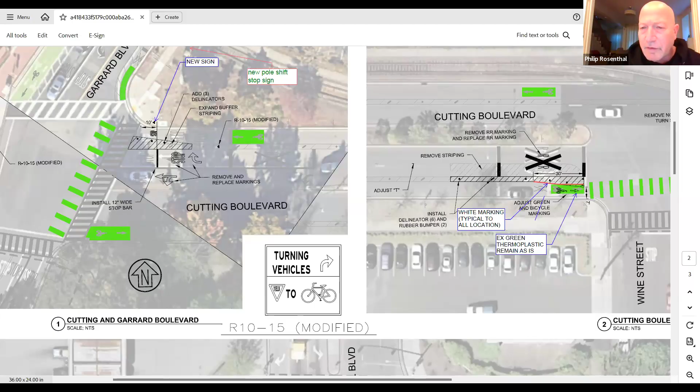Just to clarify, this is Scenic Avenue, pretty much where it meets the top of Tunnel and joins East Scenic. So are you going to stripe Tunnel, to help the cars understand how to go? Yes. Absolutely, and it all came with the request. Philip is the lead, and we listen to the community, and we're invested, so we heard you and we're taking action right now.

Second project, I don't know how much you guys are aware of, Caltrans is going to shut down the on-ramp and off-ramp at Stenmark starting June 1st. We usually get notification from Caltrans, and like I said, the Stenmark Drive on-ramp will be closed sometime around June 1st or 2nd. So stay alert, don't take that ramp to the 580.

As Philip mentioned, let me bring it back. As Philip mentioned, we've got three projects ongoing. The first one is the cut through, which is sponsored by BATA. Basically, the scope is to deter motorists from driving through the local streets of Point Richmond, and we're going to study and enhance it, maybe increase additional crosswalks and additional humps. We're still gathering information, and we need your input, it's very crucial.

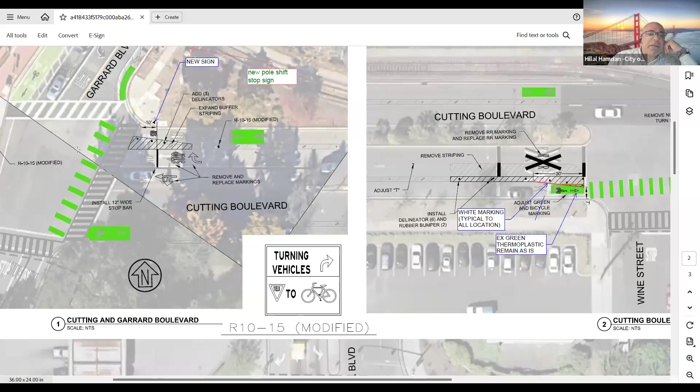On Cutting Boulevard, we're going to stripe it differently. Instead of going straight through like right now, we're going to make it, as you can see, a right turn lane, with lanes for right, straight, and left turn. So that's part of the enhancement that's coming. Hopefully in the coming weeks we'll have a contractor who's going to start working.

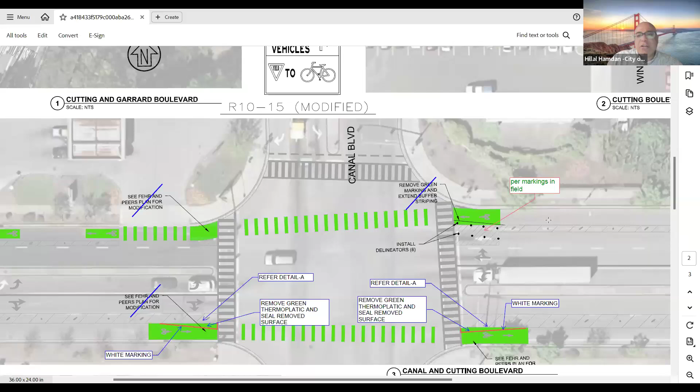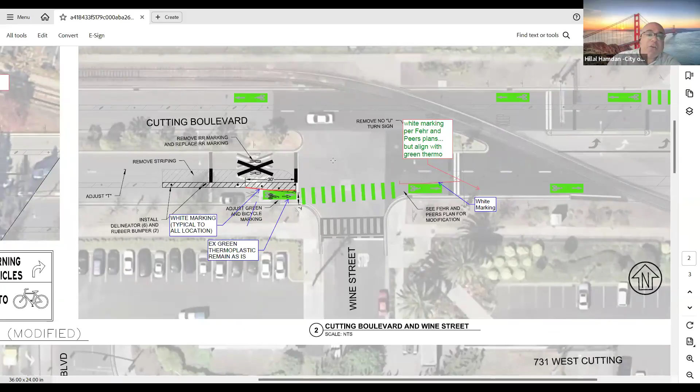Again, additional signage we're gonna be also removing. There's a U-turn here that says no U-turn. We're gonna remove it and let it through for people. For example, if we have a train stuck on the track and people still want to go through or make a U-turn, we'll have the possibility to do it at this time.

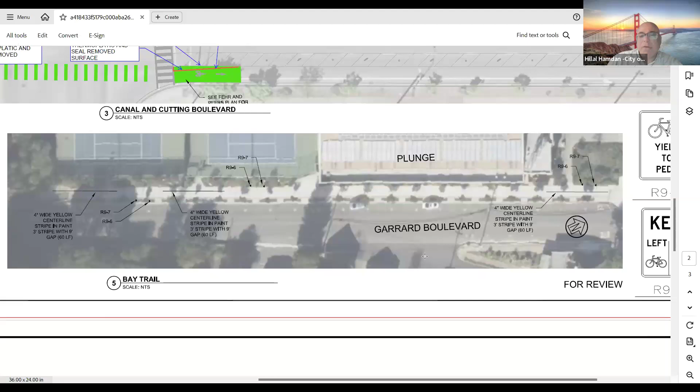This is part of the previous project, but again, comments and feedback from the community. So we're addressing it, we're gonna enhance it, and make it easier, facilitating the operation of the bike lane as well.

Before we move on to the next project, it looks like Peter has a question about the previous statement. Peter? You're muted, Peter. You are on mute, Peter. Unmute on your end, please.

And Kate, do you have a question also? We'll get you next. Can we jump to Kate Spalding and back to Peter when he unmutes? Edie, can you hear me now? Okay, now we have Peter, and then we'll go to Kate. Yeah, my computer died, so I'm on my phone for this meeting, and it took me a minute to figure out how to unmute.

Anyway, you had mentioned the closing of Stenmark, and we see the signs. What does that mean for those of us who live here? I live at Point San Pablo Marina on one of the floating homes, and we only have one exit off the freeway to get here. Well, Caltrans sponsors it, right?

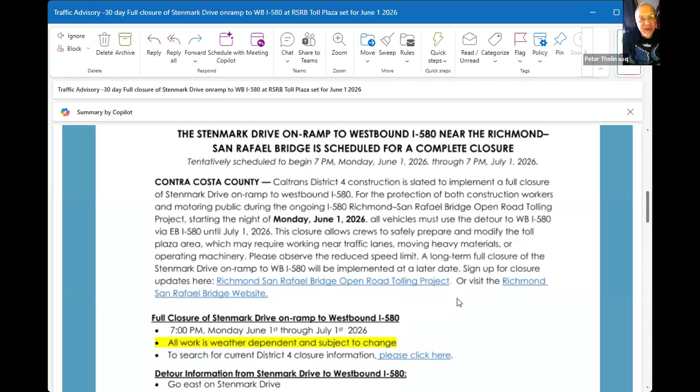So you mentioned earlier that the exit to Stenmark was closed. Is that not the case? The exit from Stenmark to the 580, yes, that'll be closed. But 580 to Stenmark, is that going to be closed? From the 580, no, it's not going to be closed.

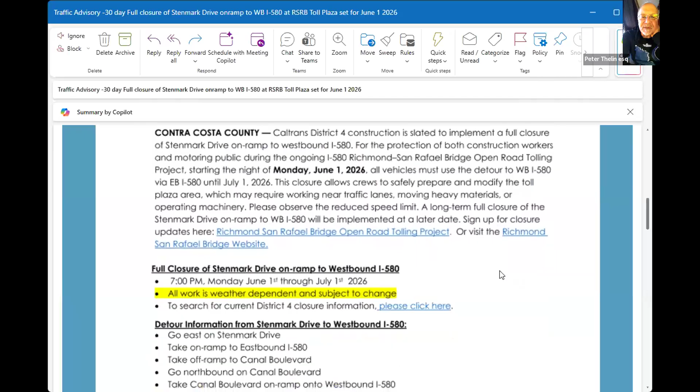Okay, all right, so we just have to go across the bridge. Thanks, and can we assume there'll be road markings for the detours? Absolutely, absolutely, and Caltrans will take care of it. I don't know who the contractor is, but they have their own contractor. Thank you, Peter. Okay, all right, Kate, did you have your hand up as well?

Kate? All right, I don't see Kate here now. Let me go to Kate Spalding. Yeah, Kate, unmute on your end, and Edie, will you check with Kate Spalding? Well, I mean, I can't check any more than saying this. So Kate, please unmute. Kate, you are still muted. And Philip, I see.

Council, can you hear me now? Yes, yes, you are here.

Okay, thank you. So sir, my concern is I had difficulty orienting on your city maps, not knowing which way is east, west, north, south. If that was apparent, I couldn't see it. So while you talked about several aspects of cutting, it would be a great help if you could orient which way is Point Richmond and which way is... I don't know the orientation.

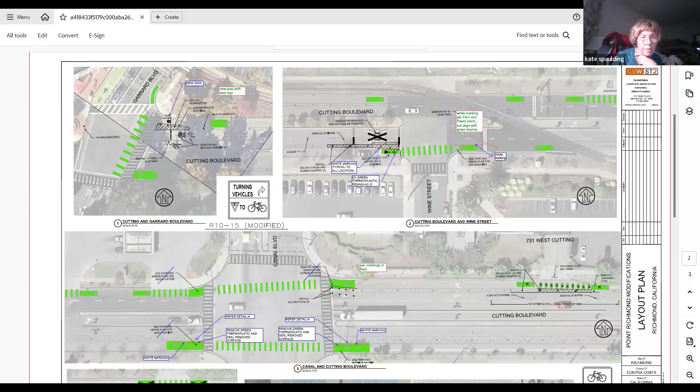So the striping will be changed here. Usually there were two lanes and they both go straight. We enhanced it so now we have a dedicated right turn lane to Garrard, and the other lane is through and left to Garrard. That's the change, you'll see that soon.

Did I see them spray painting on Wine Street at Cutting to make that right-hand turn to the elementary school on Wine? I saw some spray paint on the street. No, the spray painting is just to see how those enhancements will play out. They have to do some adjustment in the field, but not yet.

So my understanding is this is not the total project, it's just what's happening first. Exactly. Yeah, thank you, Kate.

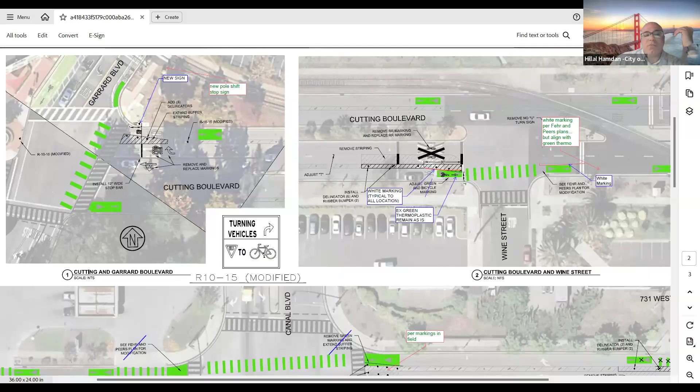And then the Cutting Boulevard, this is by Wine Street here. There's a no U-turn sign we're going to be removing. So if people get stuck by the train and want to make a U-turn, they'll have the possibility to do that, coming back on Cutting all the way and taking Garrard, or back to Garrard, or whatever.

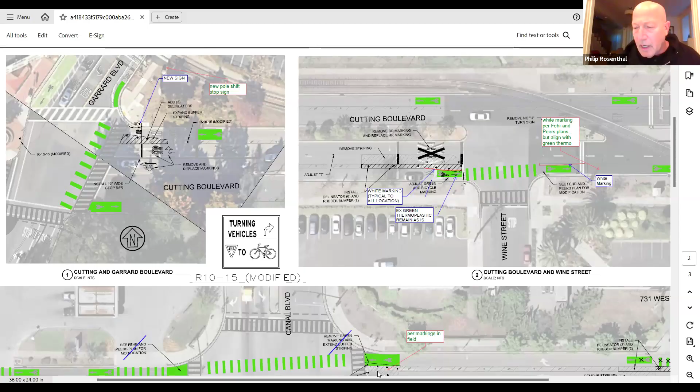Hilal, I had a conversation with a neighbor today, because one of the concerns—and you've physically taken this drive with me—is that we don't really want... you can make the U-turn if the sign isn't there, but you physically can't as long as there are bollards or armadillos. So it was suggested that part of that trail, that northern bike lane, which was installed specifically because of train regulations and was never really intended to be there, could become a sharrow, meaning one of those lanes with an arrow so bicyclists understand it might not be a dedicated bike lane in an emergency if someone is making a U-turn. Is that a possibility, or is that a whole other conversation?

No, it's a possibility, but what we did is we gave enough space on Cutting so people wanting to do a U-turn have additional room. We're also looking to enhance and remove some of those channelizers so they don't collide. There's a challenge, of course, making a right-hand turn onto Garrard from Cutting because the right turn lane was removed, so we do have some backup.

I don't want to take up time with that because it's a separate project, but I'll walk through it with Jessie and she can pass it on, or next time we see you, or Gail. Sure, Gail's really welcome, by the way.

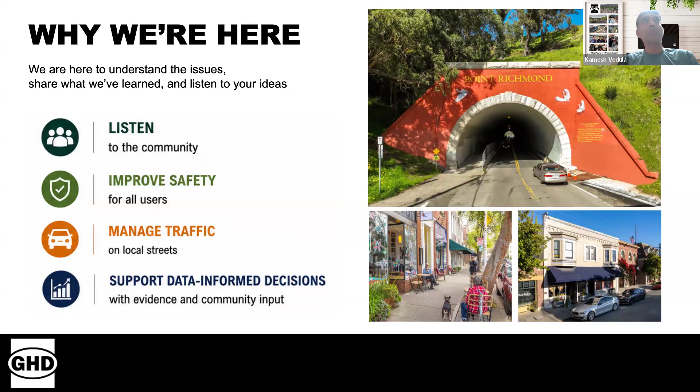We've also used some big data sources to validate some of those cut-through patterns in addition with some field observations that we have done, so we'll share all those with you. You probably already know this, but for our sake, we did all of this to ensure that we have the right data to make some of the options we'll be presenting here.

So the problem here is there is definitely some congestion that occurs on 580, and so people are using the cut-through traffic as seen in this yellowish line. Mostly they're cutting through and going on Railroad and Santa Fe. That's what we noticed, and then they're going back onto the freeway. So we did notice that, and we documented some of these patterns.

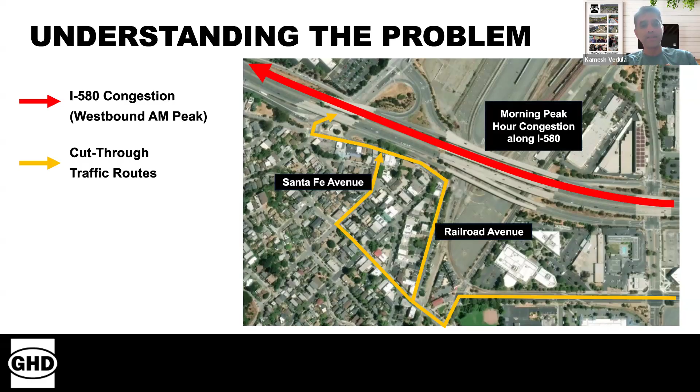Before I go into the video collection, we want to take a moment to refresh what a previous study concluded. It's pretty much self-explanatory, but they recommended narrowing some lanes, introducing some new stop signs, as long as the warrants are met. For putting all-way stop signs on all four sides of the intersections, we need to meet certain warrants. They recommended raised crosswalks. They also recommended some signal timing improvements. That was done back in 2024.

So we are here in 2026. Our intent was to refresh that study, look at those improvements holistically, and come in front of you folks here to seek your input. That's, in essence, the nutshell of what we're trying to do here.

So what we have done: reviewed the previous study, did field review, and we'll share some videos. We have Compass IoT data, a big data source proprietary to GHD, where we have data that reflects traffic patterns. We can also get some speed data through there, could do some origin destination studies and stuff like that. We also did some travel time analysis, and as you can see, community feedback, and that's where we are. The next step is to refine the evaluation based on the feedback from what we present, then before moving on to the next stage of the project, get the refinements, show them to you, and then take it to the next stage. That's the intent of it.

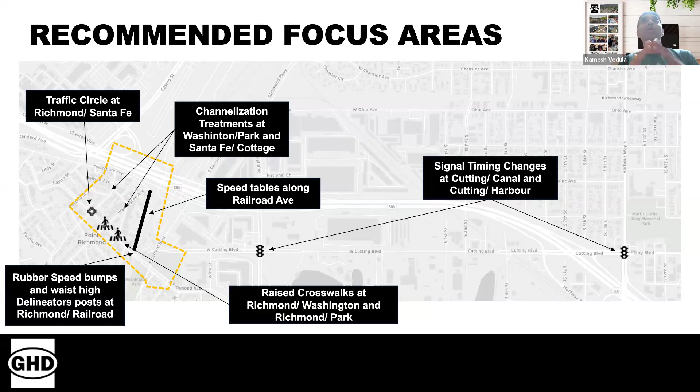So then you might wonder, how can we compensate? There is, of course, some improvements like parking tees. If you were able to paint some of those parking tees, again, that's a maintenance nightmare for Hilal and their group, but if we consistently do that, we believe there is some room to gain some spaces. But that's an overarching point that I want you all to remember, that some of these improvements, whenever we are doing new crosswalks or raised crosswalks, will come with that compromise, or a sacrifice, I should say. All right, next slide.

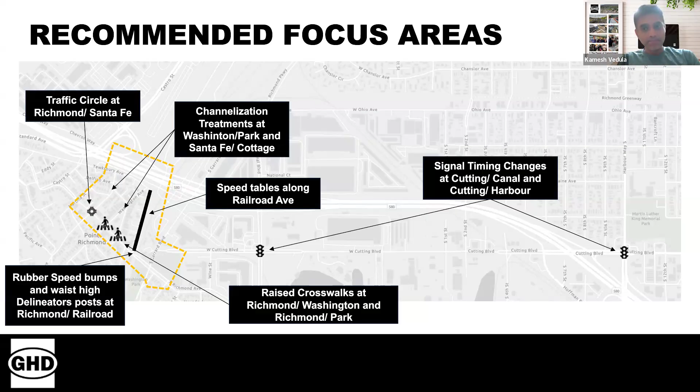Before I go in, I see a hand up. Bruce, yes, please. Question: you show a traffic circle at Richmond Avenue and Santa Fe. Is there room there? And there's one question. And if there is, traffic circles are great for cars, like the pair of them at Gilman, but pretty tough for pedestrians. So any questions on that in terms of, are you really serious about that? Is there room? And if so, what does it mean for pedestrians getting through the circle?

Yes, we will address that. Great question, Bruce. We will address that. I believe there are some slides on that. We'll get to it. Yes, I will address that, and we can engage more on that when we get to that slide, Bruce. Yeah, because that speeds up traffic, not slows it down.

Okay, that there's a possibility that could happen too. So yeah, we will get there.

So, rubber speed bumps. The intent of these, as you all know, would be to slow them down. Railroad Avenue is where we are considering these improvements, due to the parking on both sides and insufficient width. Other improvements like bike lanes will be evaluated with other projects we've discussed. The intent of this study is immediate improvements to address the issue, and none of these would preclude anything you do in the future. So based on all that, we believe installing rubber speed bumps on Railroad Avenue will slow traffic down. The intervals, spacing, and locations need to be studied in more detail, but we wanted to float the idea with you through this medium and seek your feedback.

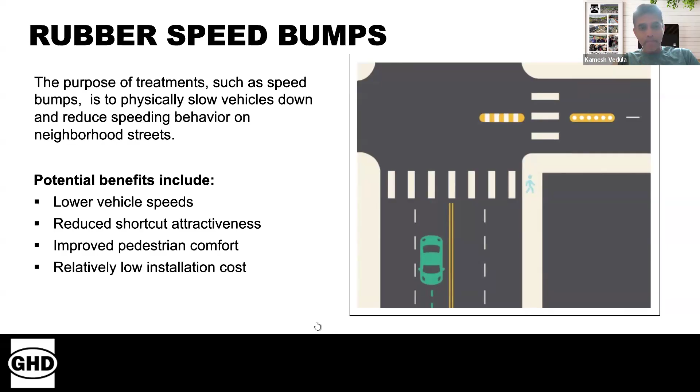Next slide, Sarah. Okay.

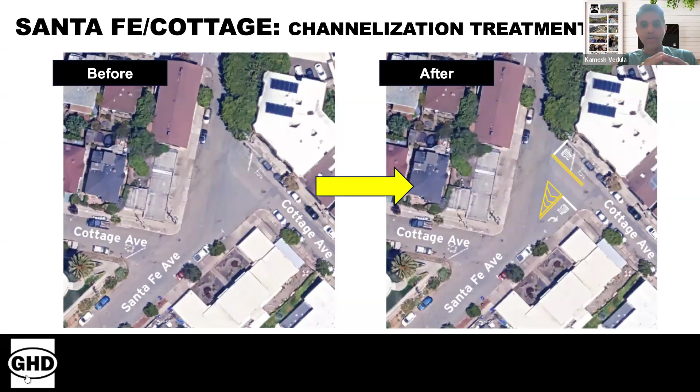Santa Fe Cottage - this is a unique location, given the angles and constraints of the parking. I think there are 3 parking garages, and some people pull into the garage, so there's definitely tight constraints. What we're considering is a channelization treatment and defining that stop sign, making it more defined on Cottage Avenue. This will provide more clarity to folks, because right now it's like a free-for-all if you're there. So by doing that, we're enforcing people to make those moves by providing additional direction.

Next slide. Similarly, same thing at Washington Park - these are similar improvements where we are doing directional channelized islands. By doing that, you would force traffic into those areas. These could be raised slightly to deter traffic. Regular motorists would definitely feel the bump, but it won't impede some of the larger vehicles.

We're also considering, based on the feedback, installing a raised crosswalk across Park and Washington. We'll have to evaluate the engineering feasibility as it pertains to ADA and drainage. If we were to do this, there could be 1 or 2 vehicle parking spots lost. So that's the give, and the gain is these raised crosswalks slow traffic down significantly. That's what we are considering at Washington and Park.

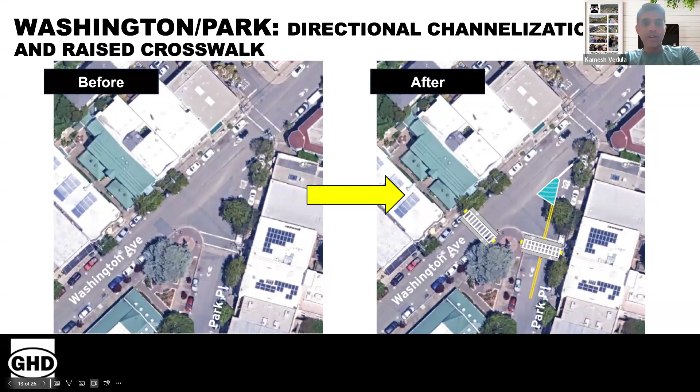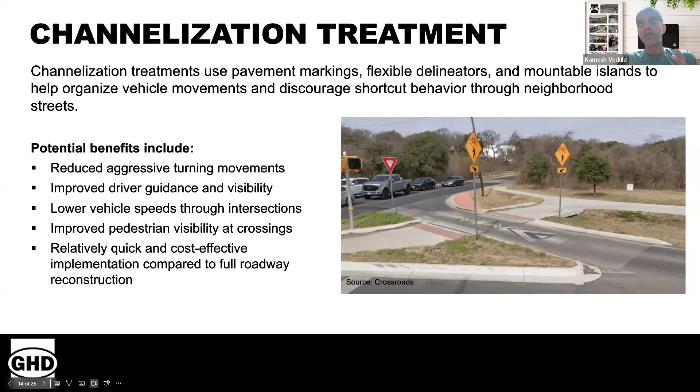Next slide. So this is an image of a channelization treatment, what it could be, as you can see here - this is what we are trying to propose. A channelized treatment could be at a couple of locations where we could do flexible delineators, and then mountable islands, we could do all of that. So this is just a visual to show you, it's good to show visuals - a channelization treatment at those 2 locations.

Next slide, please. Okay. At Richmond and Washington, we are proposing a raised intersection, pending drainage and ADA investigations, where we'll be raising the entire intersection. Since it's an all-way stop controlled intersection, we believe a raised intersection would offer significant traffic calming benefits at this location, because all of the traffic's already stopping. So raising this out will slow them down even further, and give you the much needed traffic calming benefit on Richmond Avenue. As we all know, that's one of the things we heard from the community that they would like to see.

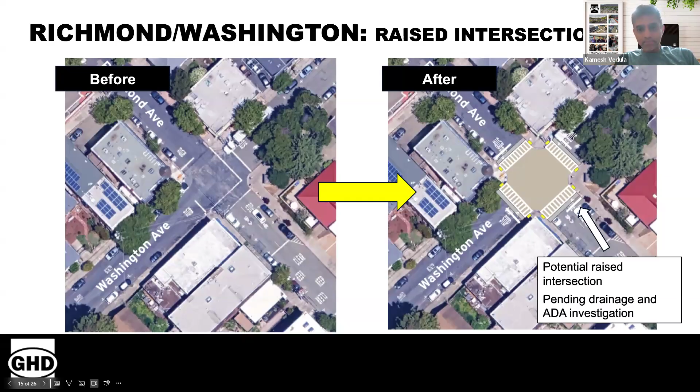Next slide. This is what a raised intersection would look like - a slight vertical profile, elevated, that you will feel, and you will definitely slow down if you're a motorist. It also improves pedestrian visibility because they're raised. It's good for neighborhood-oriented streets, and we believe this improvement bodes well with the character of downtown Richmond.

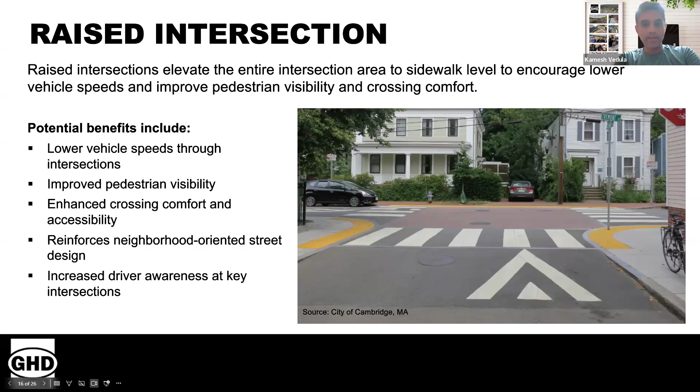And then there is also mention of Park Place and a raised crosswalk consideration there. Today, there is not a crosswalk on Richmond Avenue for quite a distance, due to various constraints - parking, angled intersections, utility poles. But this is one of the things we heard the community would like to evaluate. So a raised crosswalk at Park and Richmond would definitely slow down that traffic on Richmond Avenue before they go to the next intersection. However, there is definitely a loss of parking that needs to be evaluated, and also we need to ensure we meet all the ADA checks and make the design work from a design and drainage perspective.

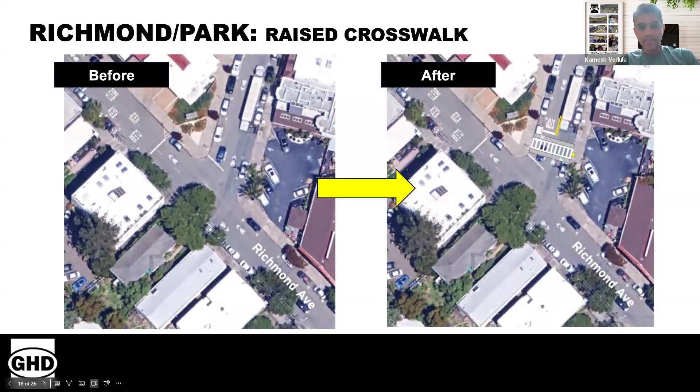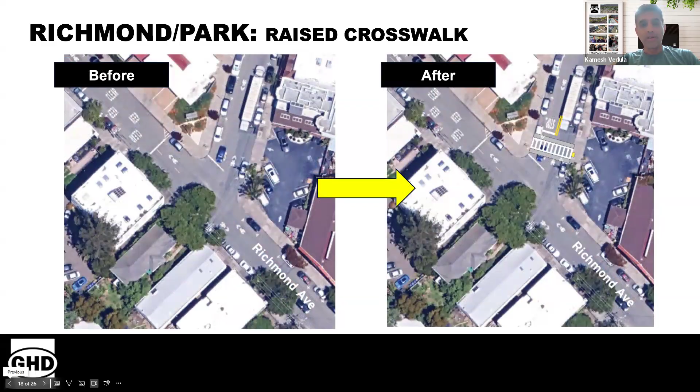The crossing on Park itself, we believe is doable without any loss of parking, because there's already a crosswalk that exists over there.

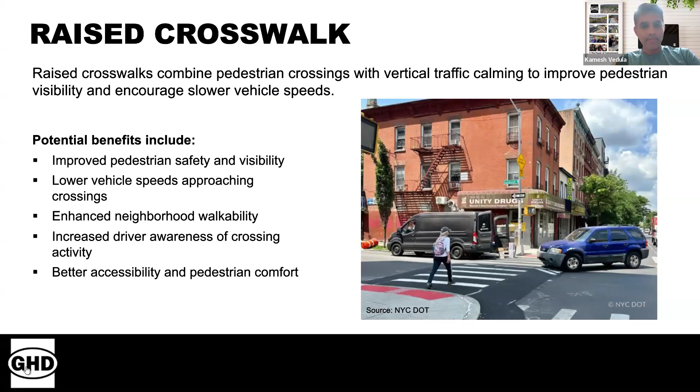They're usually fully mountable, and then give the deflection needed for the motorist. The angle at which they go, you'll slow down. But again, since this is not an always-stop-control intersection, and it doesn't meet the warrants, we believe that we should present this to the community for your consideration.

City of San Diego is installing many of these neighborhood traffic calming circles with some raised profiles that will slow your normal traffic, motor cars, motor vehicles. But then if you're a big truck, you will be mounting over it too, so there will be enough deflection for these improvements.

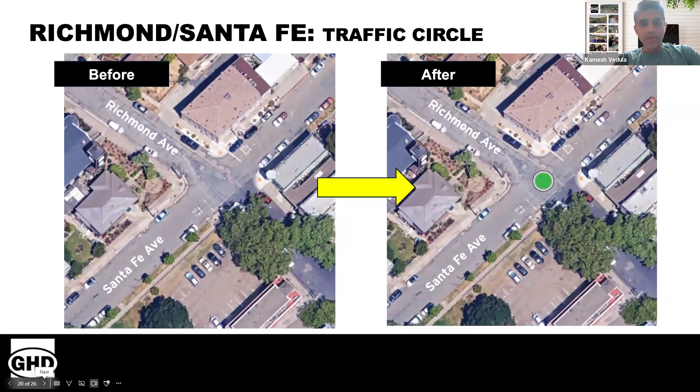Yeah, this is good. At least it doesn't show—it's not going to be like the Key and Bear. It's going to be different.

Yeah, so as you can see, there's a vertical profile, and you can see there's some deflection in there. So that'll make people drive around it, which will make people slow down. And for larger trucks, they'll be driving over that. As you can see, the 1 to 1.5 inch vertical profile—they'll be driving that over, to the tune of 1 to 3 inches based on what it'll be. So, somebody has a hand up.

I'm almost done with the PowerPoint. We can wait, or—well, actually, it's Edie, and I'd like to just ask, especially because you have this up, and it would take you time to get back to it.

I have a question. When you say that it's mountable for larger trucks, one of the issues on that road is that we have had large trucks come down there. I do not believe that road is truck clearable. If we can make it not mountable, that would be preferable, simply because many times we have had very large vehicles end up coming down that road and then having to back out, because that road, as it continues on Richmond, gets smaller and smaller until they've got themselves into a bottleneck, and then they have to back out two blocks. If we could stop them from going down in the first place, we would have saved them a lot of time, and of course saved us a lot of time when they get stuck.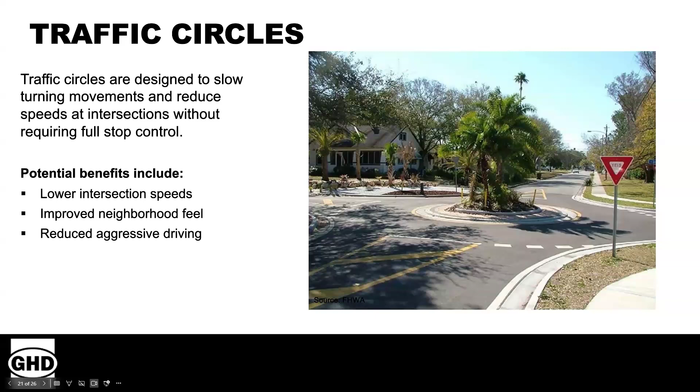And if we could stop them before they go there, that would be better for them, it would be better for everybody. Thanks, Eddie, we'll take that comment and then we'll evaluate it.

The other consideration though is the fire department, of course, so they might want to access it. That's the push and pull, right? We'll have to evaluate that, and if they need whatever deflection they believe they would like to go through, at the end of the day we'll have to design to their needs, as you all agree. That's the number one concern and criteria for us. But to your point, we could probably put some signs saying trucks, wherever the last point is, directing trucks sooner because of the narrowness of the road. I think that's something the city can take on based on these findings. Excellent, good point, Eddie. Appreciate it. Next slide.

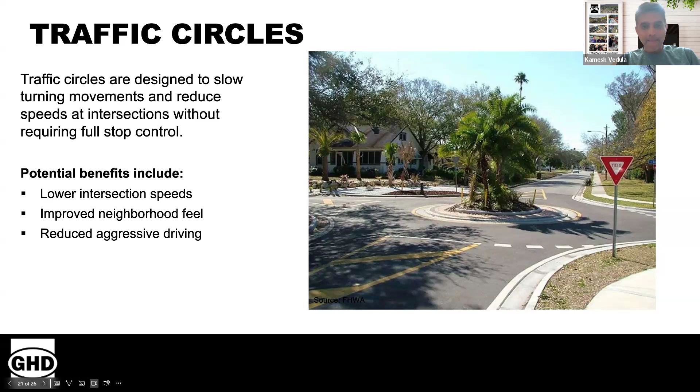It's an AC Transit route. Yes, of course, AC Transit too.

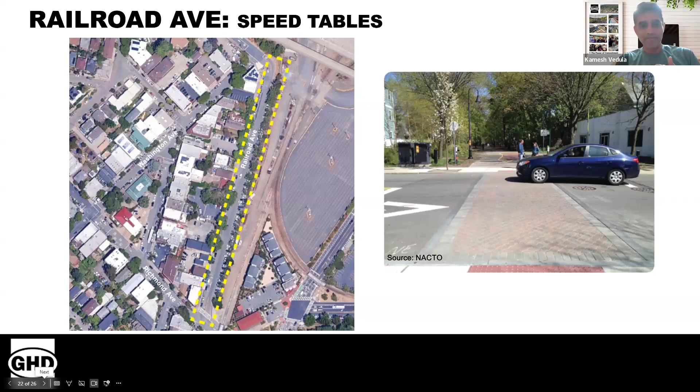Bruce, could you close your door? Thank you.

As you can see, they come in all shapes and sizes, so we can probably design them in such a way that the AC Transit bus can pass through, and it'll deter other motorists, because AC Transit isn't trying to speed through there. If we design it for their bus, other motorists following that will be going slow anyway. So the shape can be influenced, and we will definitely need to work with them and the fire department.

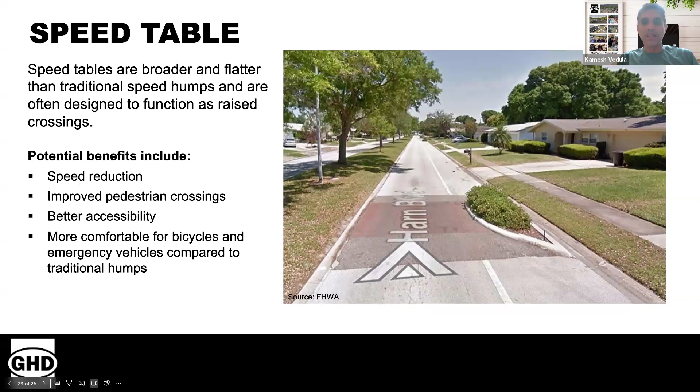So what we believe is these will reduce your cut-through traffic. There's a potential, because if you're slowing them down, they will not come here, because they'll think it's taking more time to go through this than staying on the freeway. You're lowering the speeds, and that's what a neighborhood needs to feel like. Improved safety, enhanced crossings—with these enhanced crossings you can cross those streets safely, and improve comfort for people walking and biking on these facilities. And as you know, we can solve congestion issues.

I use this strong word, but you might have to sacrifice a few parking spots. We believe we could compensate for those with other parking management strategies, like parking fees. But the feasibility and viability of those needs to be evaluated. We do believe there are options, but yeah, this is in a nutshell what we believe these improvements can do.

Next slide. So as I said, we are here to listen, and I'll turn it over to Sarah, who worked on this, before we go there. I'll also pop into questions. Before I go to the questions, I want you all to know that we've created a GHD Engage website, a social pinpoint website, where all these options are included, so you can take a look at them, read through them, and provide your feedback—options, voting, and stuff like that. Sarah will go through that; before we get there, I'd like to take questions and provide answers to the extent possible.